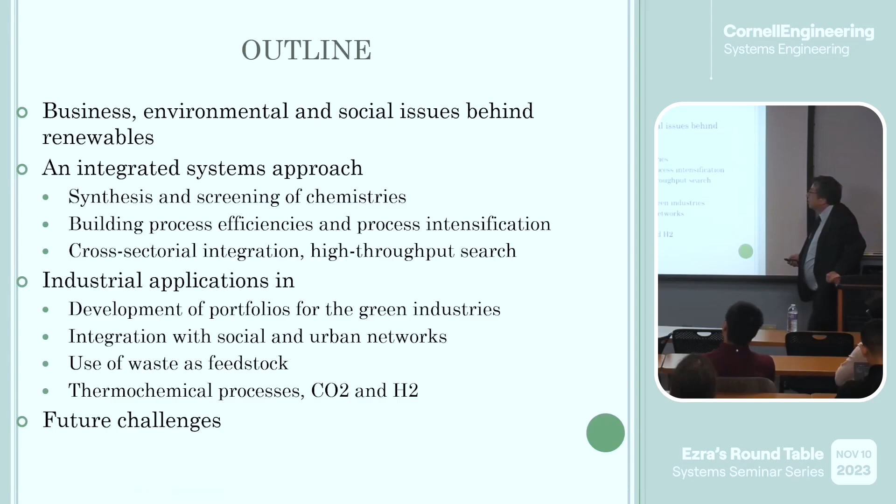As I said, I will start with a quick introduction, since we've lost time, where I try to explain what we exactly mean by integrated approaches or systems approaches, starting probably with the business and environmental drivers that have taken us to renewables. There is little to say about renewables—obviously they're very important things to consider for climate change type challenges. It is about sustainability and the future of our planet. It is also about energy security, but also about economic drives, jobs, and new technologies and innovations. So this is all about that.

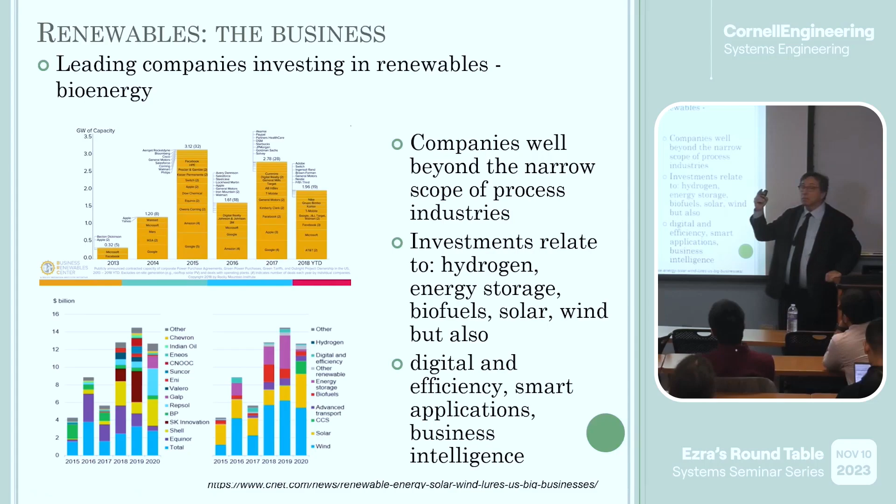It's interesting to know it's not only the chemical engineering community that is interested in this—it's also other communities. It's Facebook, Microsoft, Google that are investing much, much more in renewables than the chemical industry does. But of course, the chemical industry is doing a lot of that too. Also, climate change legislation is driving in this direction. And after all, chemical engineering has the legacy of dealing with chemicals overall, so it's natural knowledge and expertise that can be exploited. This can be even more intensive when considering aspects and challenges of circular economy—remember that in circular economy, most of the streams involved are organic streams.

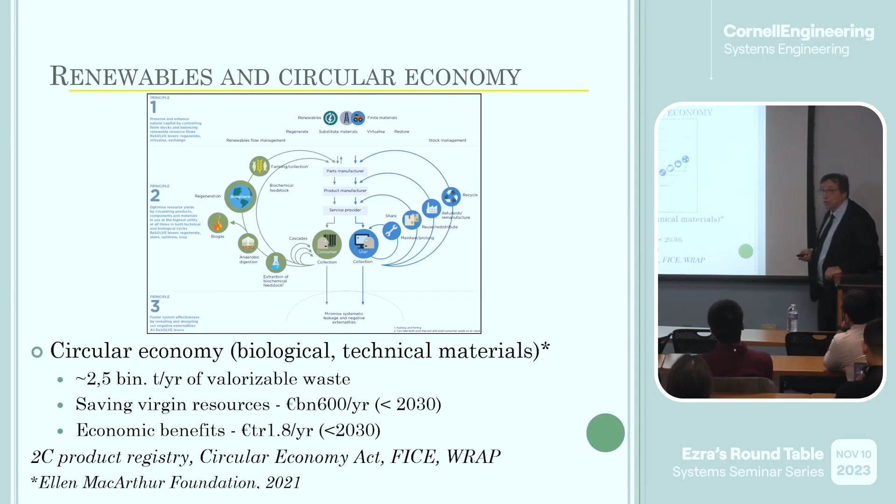So you can tell that the new chemistries that need to be developed will come from domains like us.

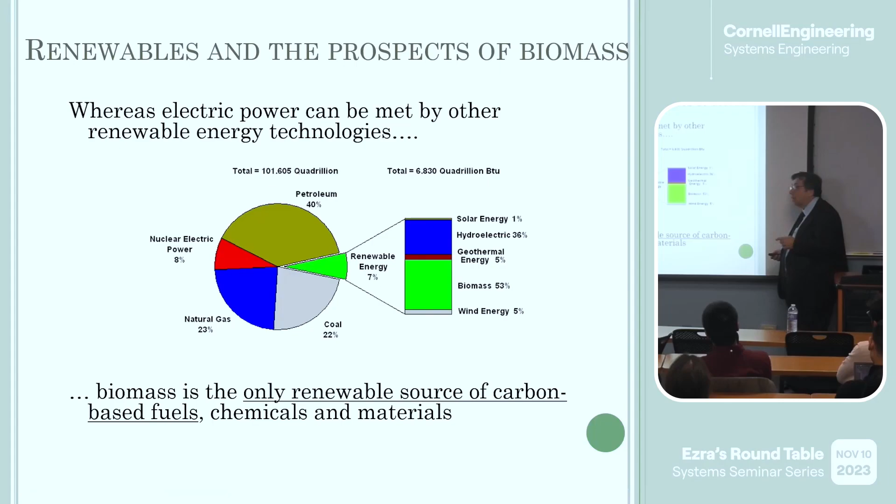I like this slide to remind people that out of all renewables, many think about solar and wind as being more important. But if you really see the fraction of biomass in these renewables, it's by far the largest part. So from all the renewables, biomass is the most abundant, the most promising, and the only one related to carbon. Carbon has been the basis of most chemicals we see today.

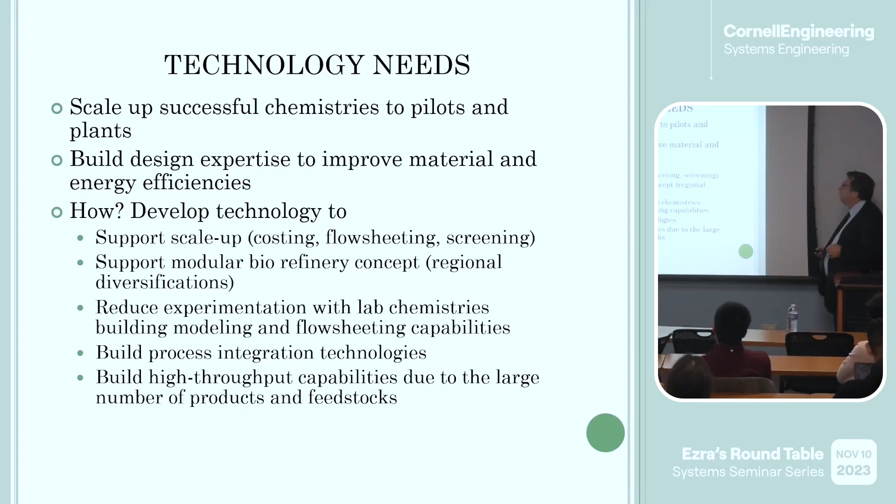And this is where most of the help is there, and where chemical engineering stands for that. We have this legacy, this historical experience. Remember, we have been the ones who started the conventional refinery. For those of you who like history and want to see what happened back then, they were subsidizing the use of fossil oil against biodiesel. So that was the time then.

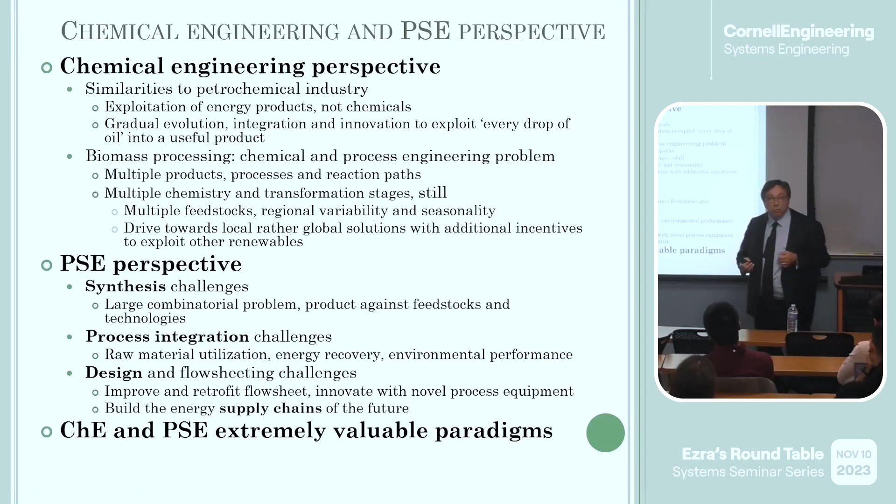They started making easy use of oil and discarding the rest. Now, getting into the point where every drop of oil comes into something useful, it's a very integrated, very efficient type of industry. Against this background, we as engineers have process systems engineering, which has an important role because it has capabilities and tools to synthesize, to come up with options, screen different options. It has technologies to build efficiency through process integration, and through modeling, simulation, and model-assisted tools. It can scope, analyze, and scale up different things.

So this is how the whole situation can be parallelized. In systems parlance, you can give this definition of the problem as follows: given some chemistries which have promising footprints, what I want to do is scale up so that I have a holistic, full use of the material. I want to identify a portfolio of products I need to develop and build efficiency, and as you would expect, this single step will not be enough. You need to probably iterate.

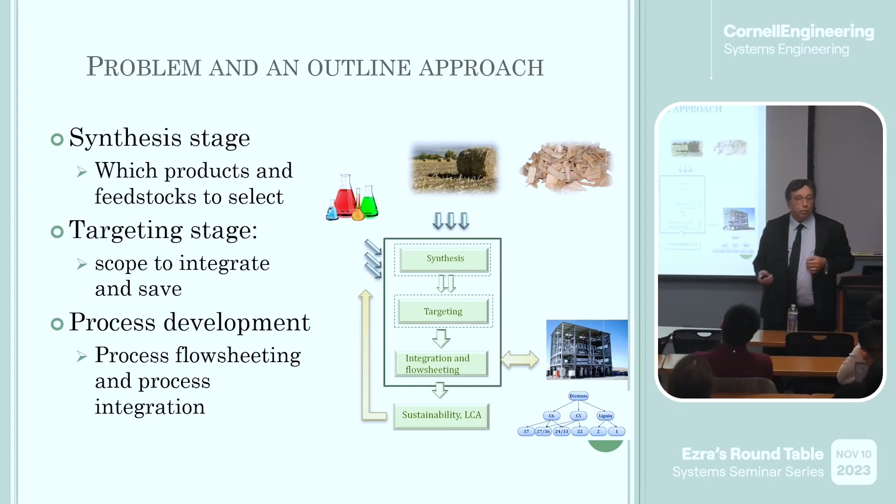Let's follow this with a real case. My first real case was 10 years ago, when we started with lignocellulosic feedstocks. We are based on French technology, organosolv, this particular organosolv process that saves lignin as a useful, valuable part. Then the whole thing is how to develop a portfolio of products that holistically uses the feedstock with best efficiency.

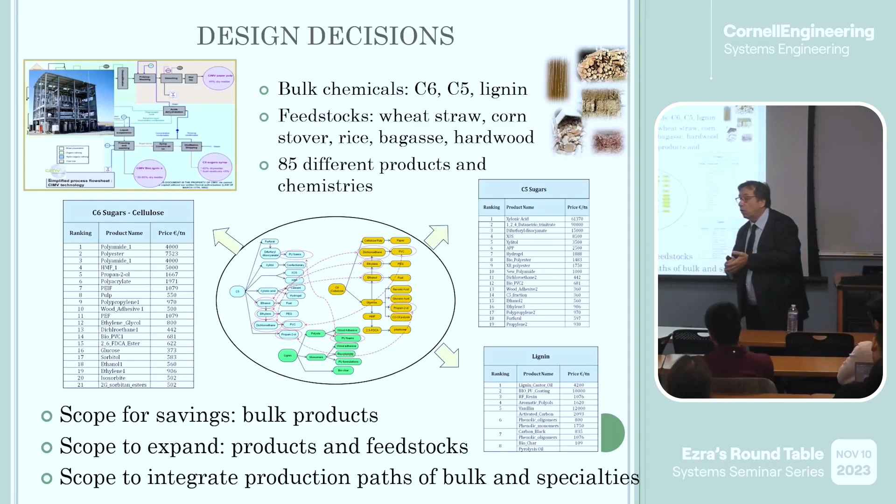So the different colors here indicate the different options you have for different products. You have to integrate in particular for each product, as well as different production lines with each other. So the first part, as we said, is going to be flow sheeting, simulation, this kind of stuff that we usually do.

And this is the kind of simulation we developed for the basic process. This kind of simulation would take for a conventional flow sheet probably 2 or 3 days. This took 2 years. Why? Because we didn't have thermodynamic models. The process engineering models were not conventional ones.

So we had to tweak around models for many, many weeks and months before we converged into something reliable. And this is the first message: when you address this kind of problem, you are talking about a possible new generation of models, not models only for process, but models for thermodynamics. You cannot otherwise tackle this non-conventional type of substrates, non-conventional type of products, and definitely non-conventional type of process engineering stages.

And then again, AI can be in terms of hybridized models, as you want to keep the first principles in place, and in a systematic way embed and incorporate as much data as you have available from the different experiments, but not wasting all this information as you move from one kind of case to another, consolidating this information for general use.

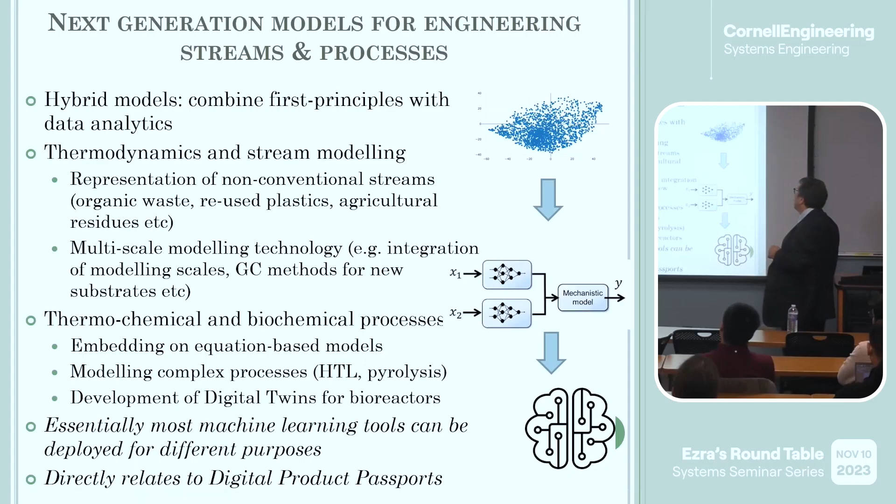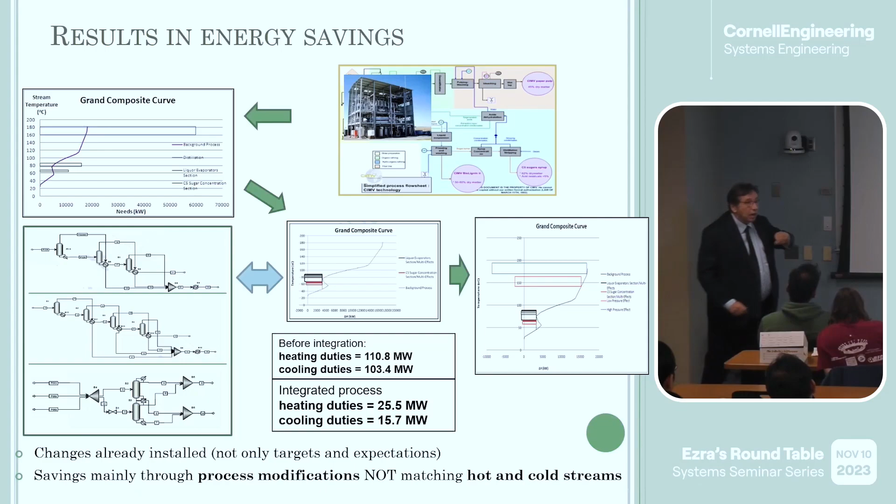Why? Because conventional process integration, conventional energy integration, first of all knows what the hot and the cold streams are. Here in our case, we don't know, these are synthesis streams. So we don't know whether they are cold or hot. We don't know whether they are large or small. So CPs are variables, the existence of streams are variables. You have a much more complicated picture. In this complicated picture, you need to integrate mathematical optimization tools that will give you the opportunity to come up with a much wider space than you have, as well as conventional thermodynamics that you used before.

It's an excellent basis to do the work. So here I show the kind of tools that we have used for individual units, how to connect these units against a moving background of options.

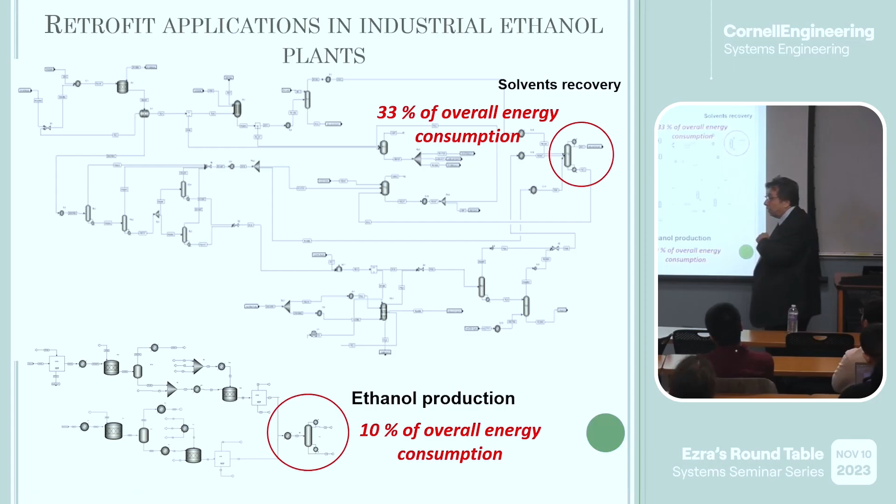In this other case, how to retrofit an existing plant in terms of its solvents recovery part or its ethanol production part. Again, remember, this can be done automatically with tools.

And this is a third case where this 39 megawatt refinery, through combined use of thermodynamics and mathematical optimization, has indicated what kind of pressure changes are needed, but also what kind of restructuring and integrated columns are suitable to be able to actually have an energy-efficient type of separation for this kind of unit. You see here, the percentages, as in the previous case, have been impressive.

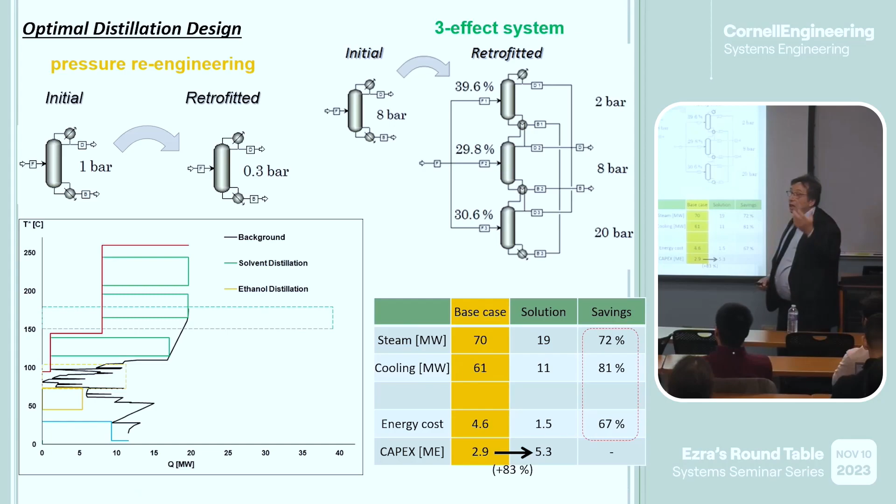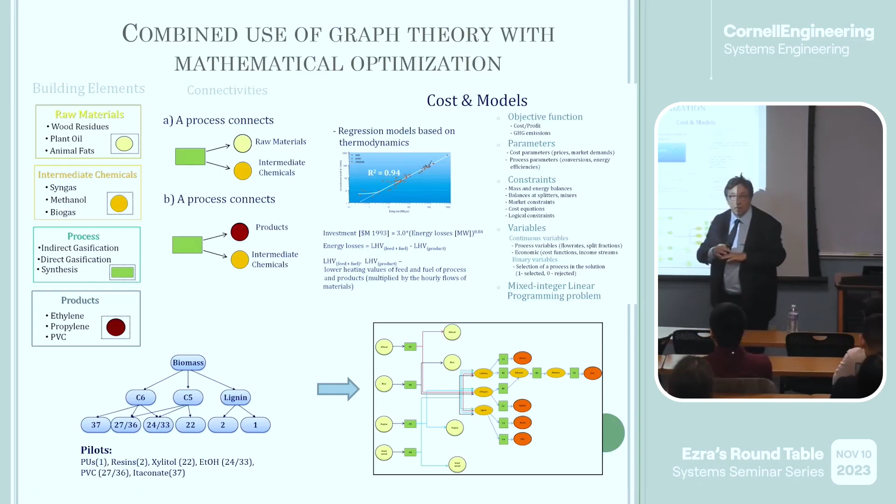So once you have all this kind of stuff, the important, exciting part is to come up with the portfolios. In this case, we have used Petri nets in order to translate the value chains, the conventional value chains, into things that we can formulate as a superstructure. The value chains are not modular enough because they have overlaps between the different parts of Petri nets, which is a kind of graph kind of development.

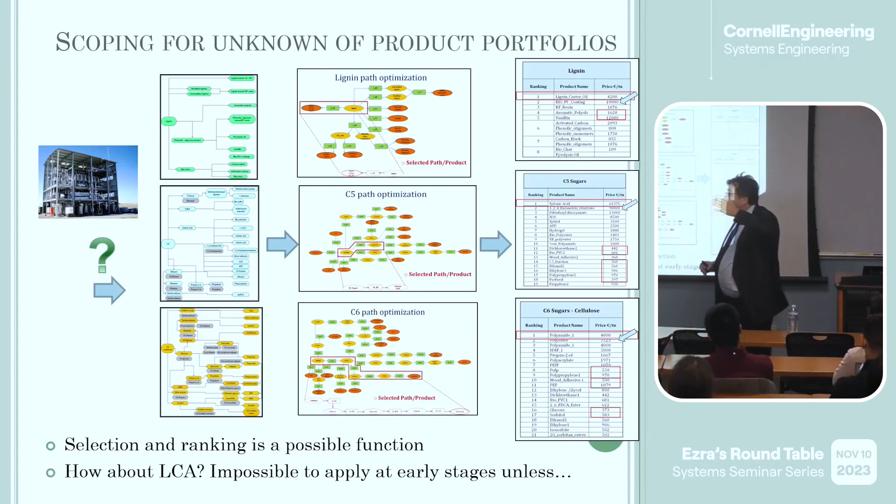This can help you come up with a superstructure that will tell about the selection of feedstocks and paths, or the selection of co-products, giving you suggestions of what you do, and going back to this French biorefinery, giving out what kind of promising products we have for each individual fraction.

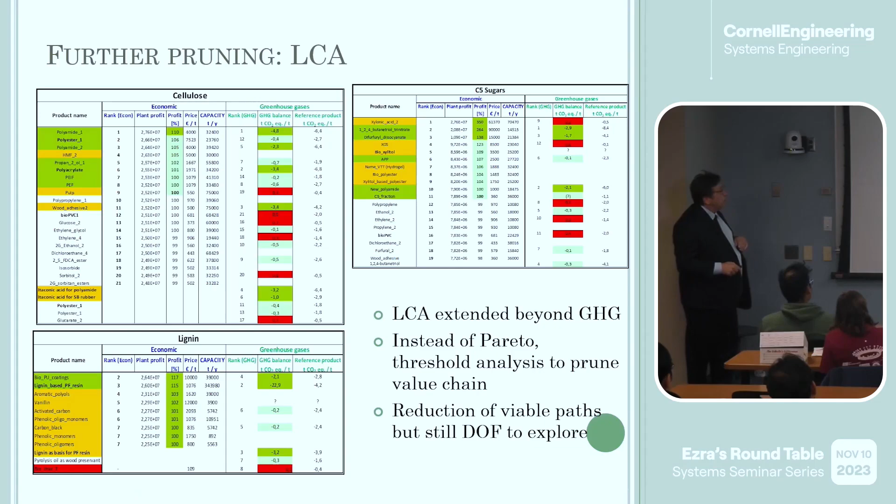So what we have now is, we haven't had an exact portfolio, we have the most promising products. So we have tailored, we have pruned the large tree into a much smaller tree, and now what is left to evaluate is energy integration across different paths.

So remember, so far we have assessed, we have evaluated each individual production line. Now what we are going to do is assess the scope to integrate one full path with another full path. If you really see, this is also covered in conventional energy integration. This is what they call the total site analysis.

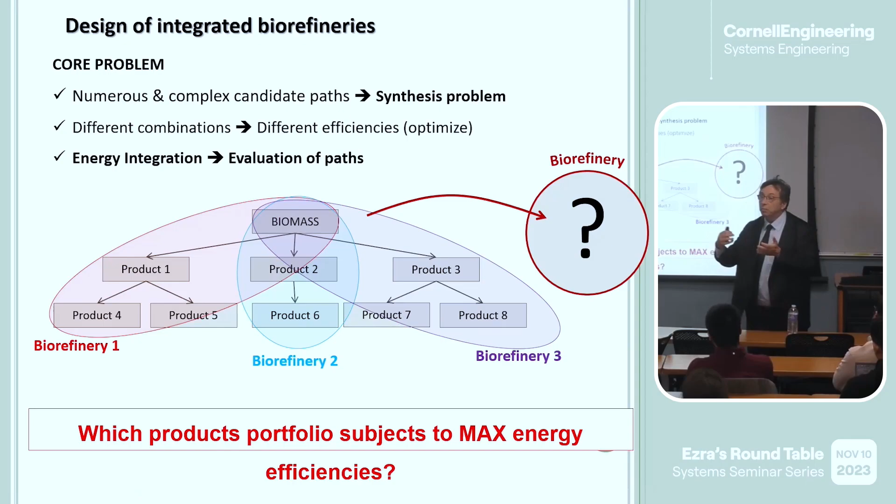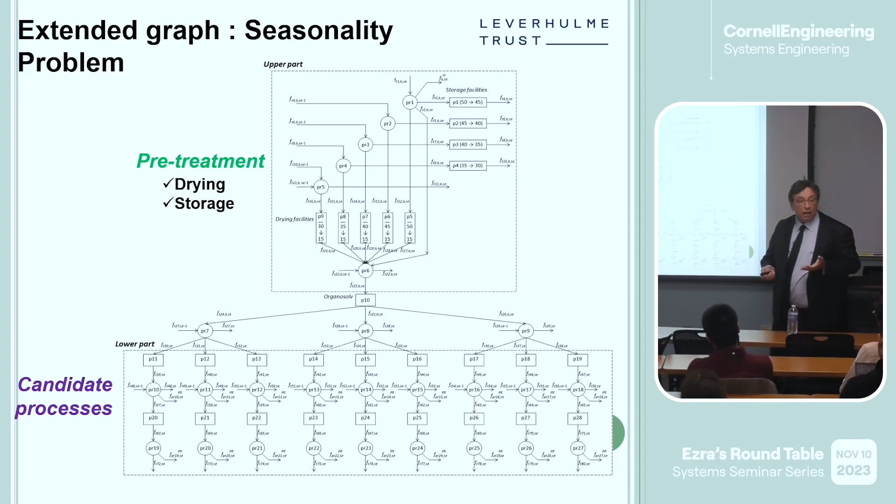But again, as it has been with conventional process integration, this is all on the basis of fixed streams. In our case, these kinds of streams may have a different identity, may have a different capacity, may be a different thing. So again, you have to rely on mathematical optimization plus thermodynamics, where this is one part for the pretreatment, and then you have more or less a hyper cascade kind of formulation, which you can set up on the basis of thermodynamic values and optimize as a mathematical optimization problem.

I mean, I can pass this one. Basically it has mass balances around the graphs that I was showing before, as well as this hyper cascade, which is more or less a combination extension of the thermodynamic models that are used for targeting energy.

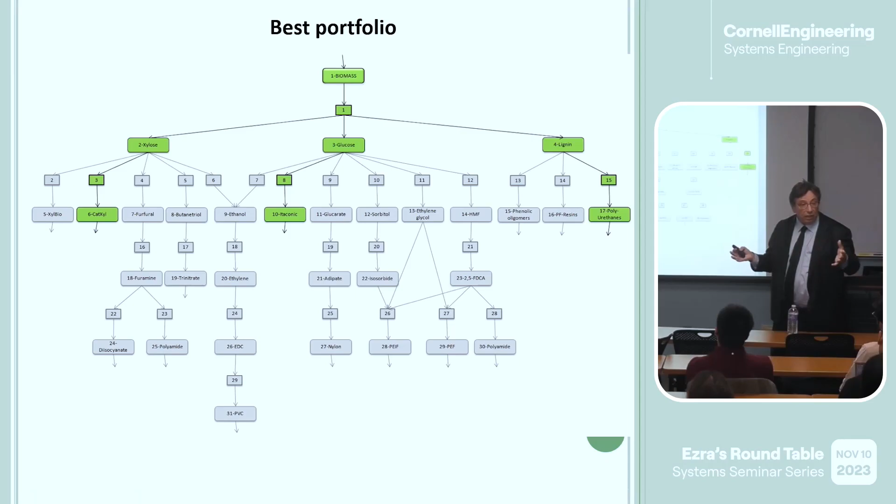So this kind of thing can be applied systematically to come up from this kind of pruned tree of the previous stage, to come up with options that offer better integration, accounted for in terms of savings.

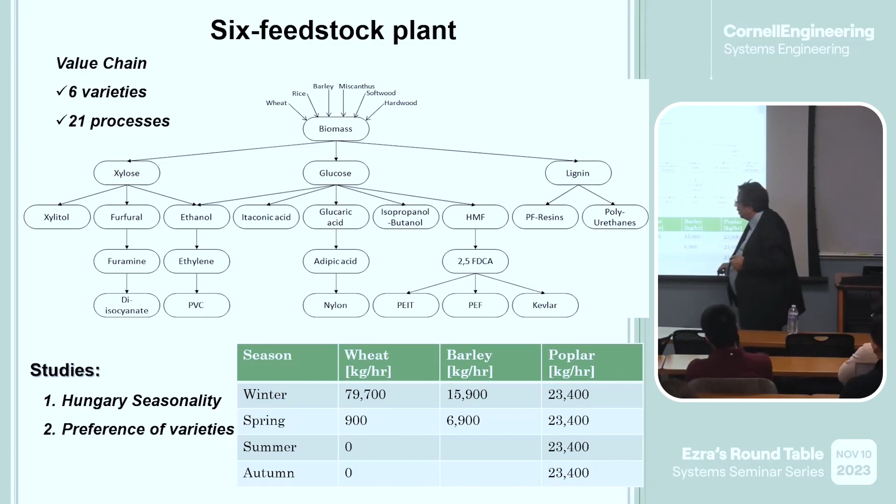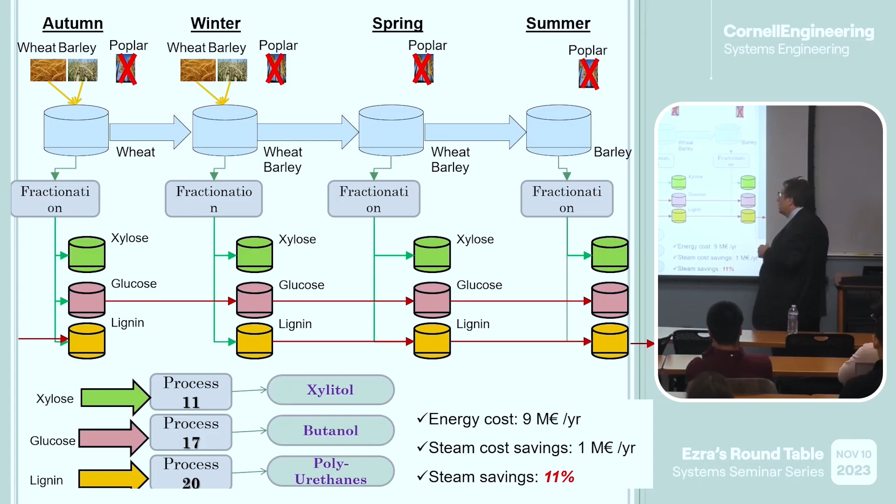Let me go quickly through the extensions I've done. One has been in terms of multiple feedstocks. Here you have 6 different varieties of feedstock, again 21 processes. This has been a real problem in Hungary, Central Europe. And you've seen the kind of schedules you can identify using extensions of mathematical optimization tools. You can also account for changeovers with respect to the different feedstocks available.

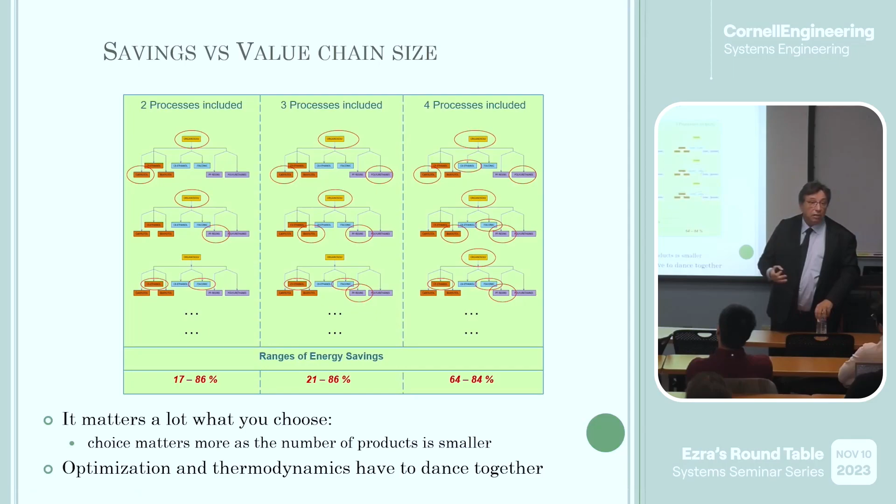You can mitigate the extent of integration and have safer or less intense options, as we saw in these pictures. As a general rule, as expected, the larger the biorefinery, the larger the scope of integration. Again, I'll go quickly through that. You can also address waste minimization and waste management around this biorefinery.

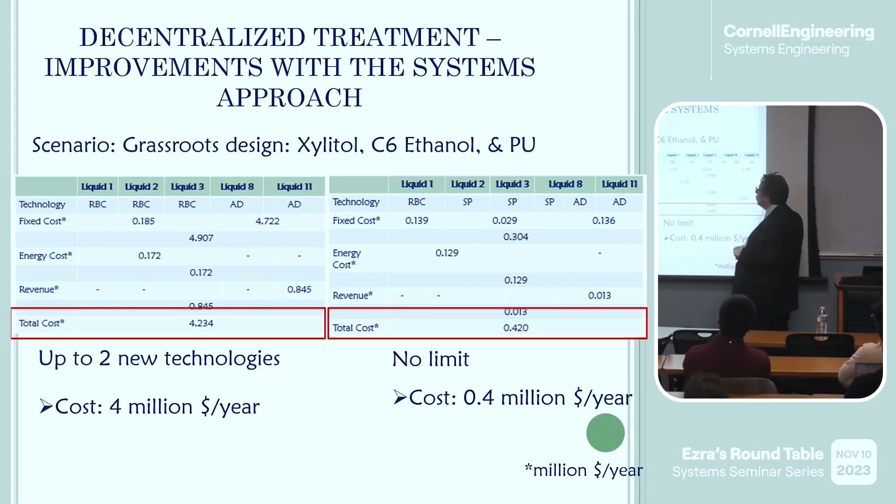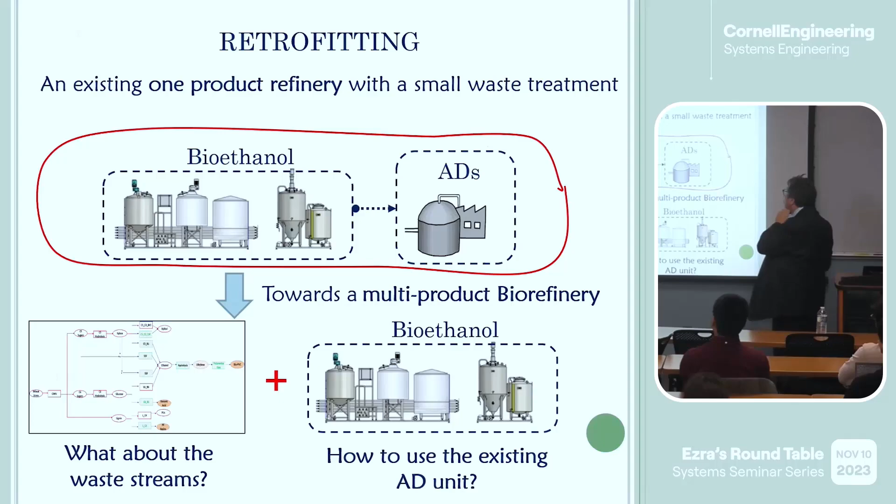Here you have a large number, 49 waste streams that you need to take care of. So you can do that again by extending the superstructure, optimizing the whole thing, accounting for cases where you have a target, no restrictions, or setting up targets. In this particular case, this was the real part, accounting for retrofitting, in other words what kind of investment you would make in order to manage your stuff properly.

And then in the end, rather than paying for that, you can identify some profit. The cost lines I was showing before have now become not a burden, but actually a profit. We said we have a systems approach, meaning a generic approach, so you should be able to repeat this kind of stuff for any other biorefinery. So I'll go to another biorefinery, very different now: the algal biorefinery.

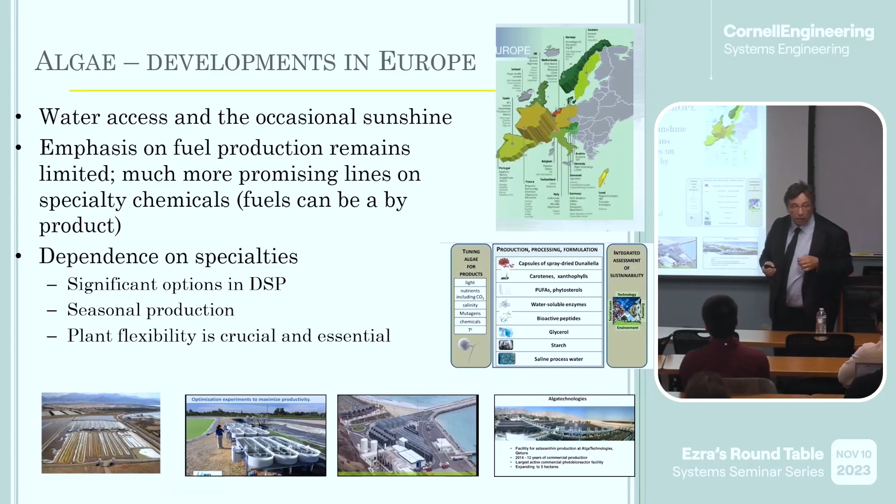This is processing Dunaliella salina, a more promising type of product. Again we bring up the same type of three-layer system. The value chain is more or less this one, a new type of value chain now. And we have to do the same thing we did before. And this is what we do.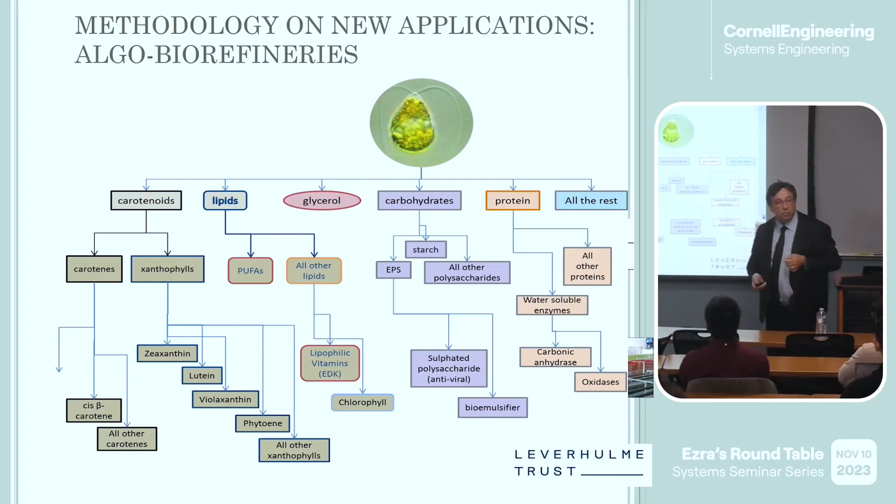Basically, we have 4 different stages here: cultivation, harvesting, fraction extraction, and product recovery. So this is the kind of stuff where we need to identify the appropriate separation stages, the sequence, and the integration between them.

But let's take a break and ask: what's the big deal? How about doing that in a more spontaneous way? I mean, I go and identify one good product, develop the biorefinery, then go to the second product - the sequential approach, as we say. What do you miss out of that? Actually, this is a historical example, because this is how the Israelis developed their biorefineries.

So let's say glycerol is a nice potential for fuel. This is the kind of flows you can have, these are different compartments - again, I'll go quickly. Single product glycerol: this is a biorefinery with a single product. This is unsustainable; it doesn't make money.

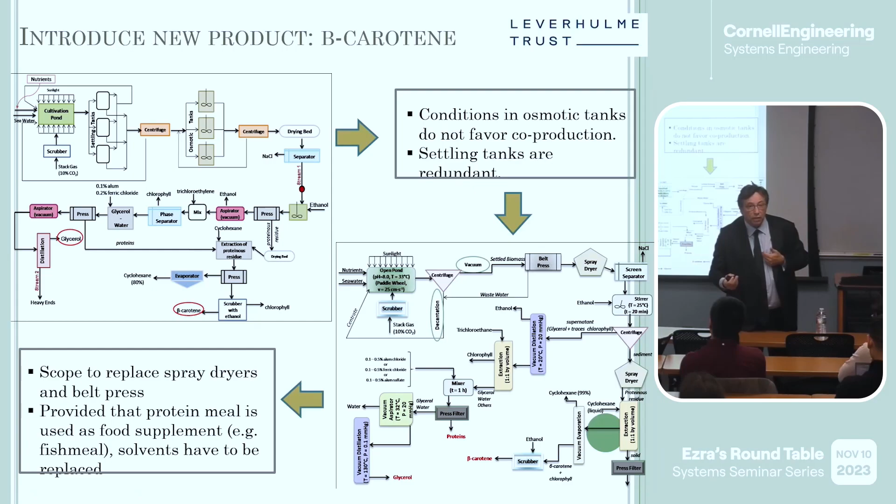So you go and say, how about introducing carotene now? As you introduce carotene, you see you move from this flow sheet to this other flow sheet where things have changed: the sequence has changed, the process has changed, the integration has changed. Well, if you do that, the good thing is you have turned your losses into profits - from this viewpoint, you have done a good job. But if you assume you had done the sequencing before, you are actually changing the whole plan into a completely new kind of thing.

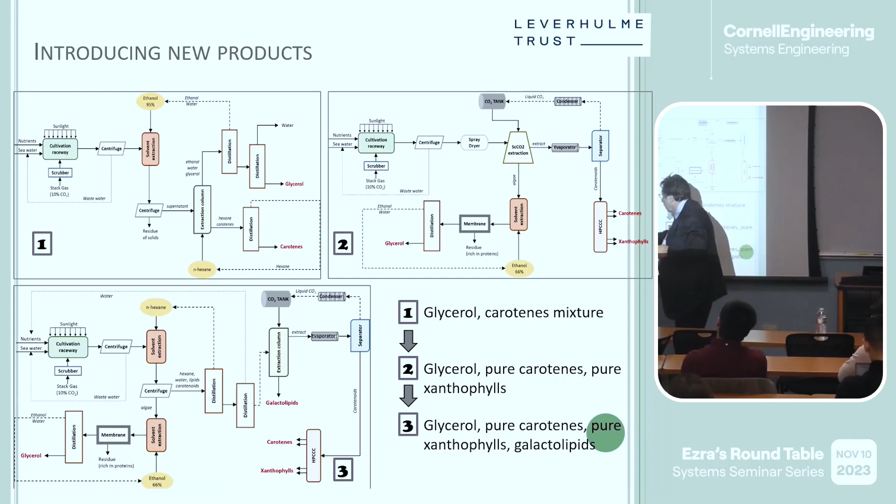And if you do that continuously with other products, so here we had the glycerol, we involve carotenes, then carotenes, if they involve xanthophylls, or if they involve galactolipids, yeah, then you go from 1 to 2 to 3 to 4, and then you see that the flow sheet continues to change completely. So you can say that the sequential approach is a good way to burn money, like water, yeah, spend money like water.

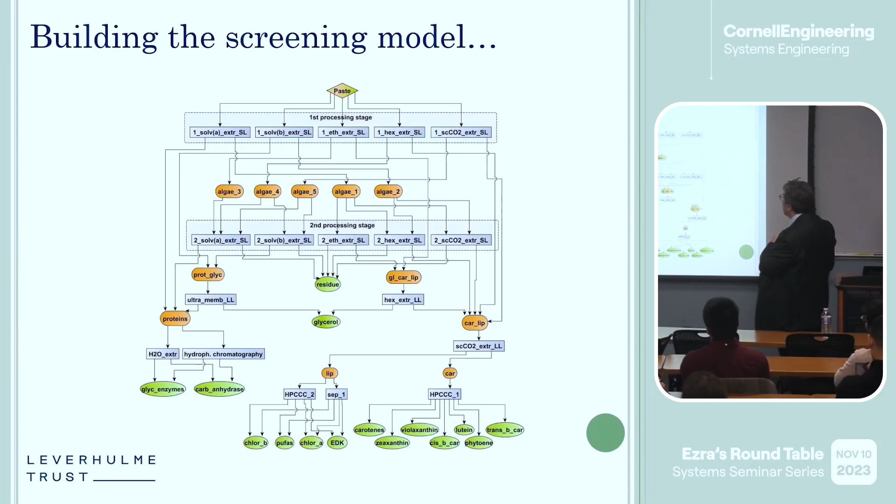So the simultaneous approach works differently. It brings everything together, as we said. It identifies the different options, processes, products, and you can build these superstructures as different instances there. And you can optimize the superstructure for a number of cuts, and what you get is some sort of target profile, where for each different region you identify a select number of products, processes, and portfolios. The actual type of processes, products and portfolios will come up through this kind of graphs that identify more or less what are the most critical processes for you to involve if you really want to optimize these different options.

And this is in terms of products, you see what kind of products appear more profitable. Algal biorefineries produce specialties, and for specialties we never want to have large volumes, because we shoot our own foot, we need small batches. And there is a challenge there: what am I gonna do with my plant for the remaining of the year? I produce in a batch for a month, for 2 months, and then how about the other months? So multi-algal biorefineries give flexibility in cases where some of your products may be cancelled by the FDA or whatever - what are you gonna do?

So because again you have a systems approach, you can use this to formulate multiple kinds of strains, as I will show here. You can have different value chains from different strains and develop these designs uniquely for all of them. So this is designing a biorefinery that will not treat only one algal strain, but multiple algal strains.

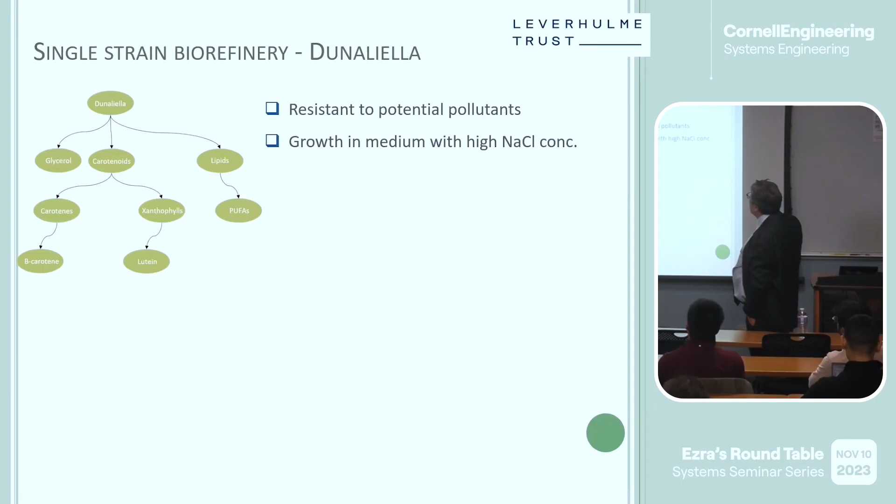I will illustrate that with a real case where we have Dunaliella, Haematococcus, and Nannochloropsis - now we have three kinds of strains. So we repeat what we were doing before. These are the three value chains, like the ones I was showing before. You can concatenate these graphs, and these are different products which are common, and you can develop, for each one of them, some sort of design.

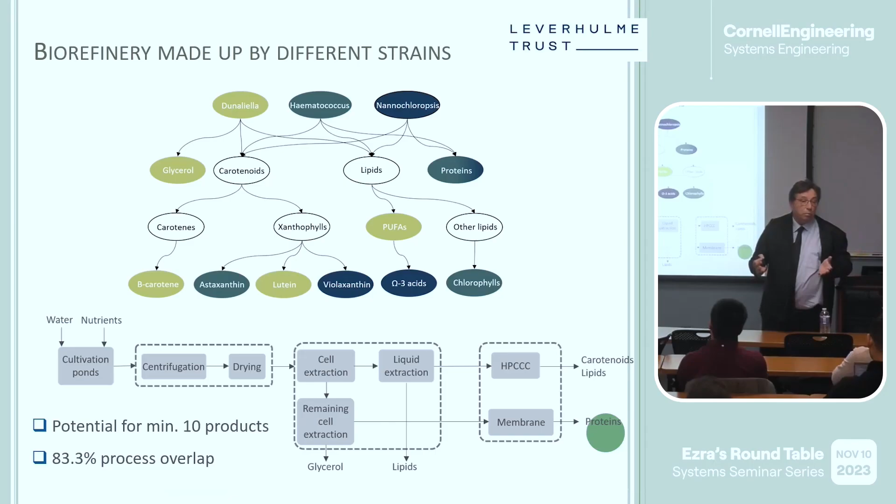But now we go into this kind of unifying thing. So we take, as we said, the different types of value chains, and we create a single value chain. And this value chain is the one we optimize. As we do that, we have min-max type of constraints - we take the minimum of the maximum piece of equipment that is good enough to process each particular batch.

And then you see more or less the difference. The flexible biorefinery will apparently cost you a little bit more than each one of the other ones individually. But this little bit more will let you operate for all the different kinds of strains that you may have. So with some additional investment, you make your biorefinery much more flexible than it was before. Before, again, it was just one strain. Now it is going to be for as many strains as you're going to put in the system.

Now, just to take some water. It's an important resource. It is. Renewable, yeah.

All right, so there is a particular challenge when you do biorefineries, or when you develop this kind of new industries, to integrate with urban and municipal streams. So there is this additional consideration you need to make, and in this consideration, sustainability is not in terms of indicators, LCA type of indicators, but it is in terms of closed fluxes, streams.

Because sustainability, the industrial ecology type of paradigm, has to mimic a living kind of system that has closed streams around their operation. So this is also the basis of the circular economy concept, yeah.

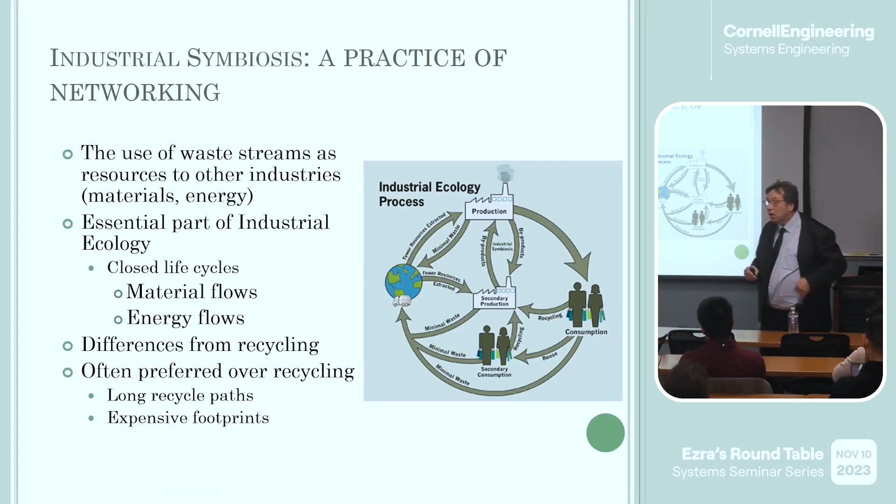Sustainability has to follow these steps. Now, where you have industrial flows, you have urban flows. Ports have been a natural bridge between these two, because industrial ports are not exactly industries, and they are not exactly in urban territories. So it's a nice kind of territory to bridge industrial and municipal flows, addressing this new challenge. We have done that in industrial ports in Europe, and I will show examples of what I presented before.

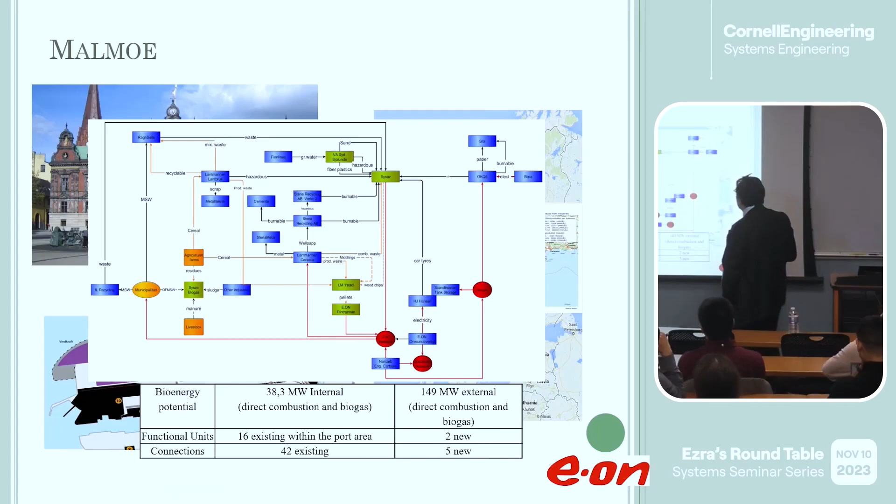Now, with respect to the ports, we have to integrate again, this time industrial and municipal kinds of fluxes. Malmö is a port in Sweden where we started this work, in collaboration with E.ON. Here is the kind of network that you develop, and the kind of energy that you can exploit out of the interactions between these two flows.

Wismar is a port in Germany, in former Eastern Germany. As you can tell, Germans are detailed and record every bit of data available. So this kind of graph appears very detailed, but in the end the potential has not been as great — it's 16 megawatts.

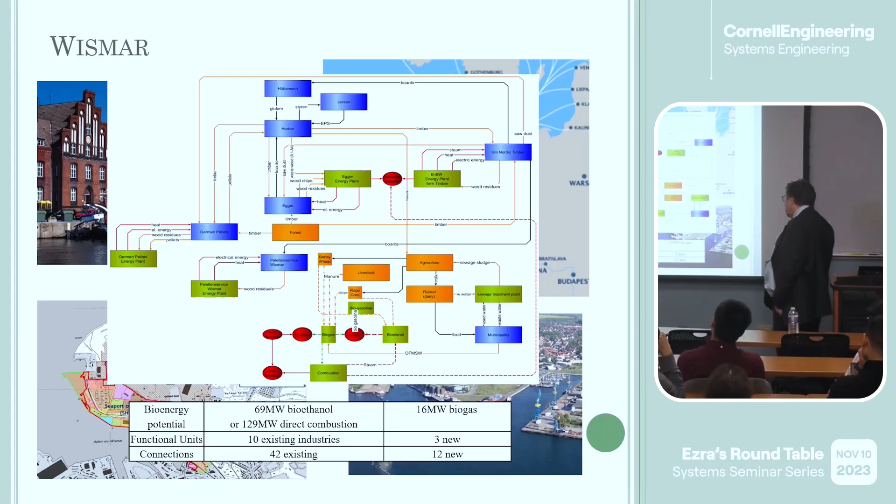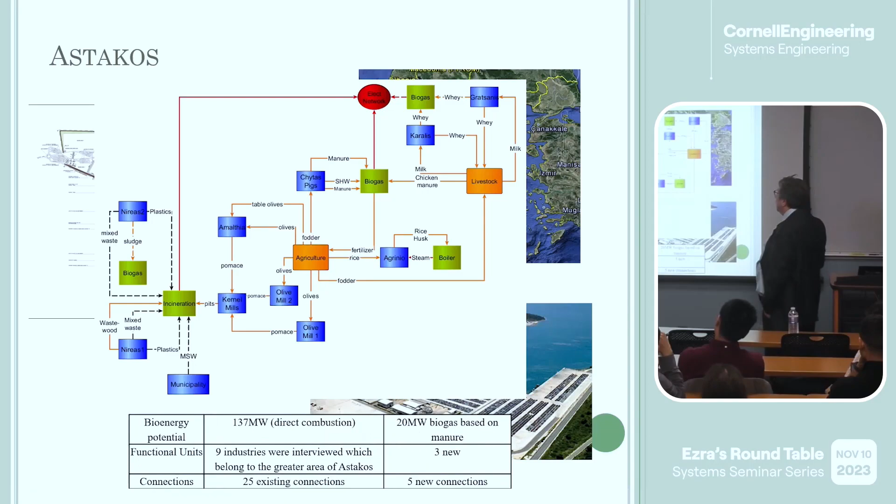This is Greece. This is a port actually which is under sale to the Arabs nowadays, and they have used this kind of study to convince people about the potential of Astakos. This is 20 megawatts, slightly larger than the German port.

The most successful one has been a port which is not exactly a port, Mantova. Mantova is a river port that connects through the river to Venice. This is a former site close to a conventional type of industry.

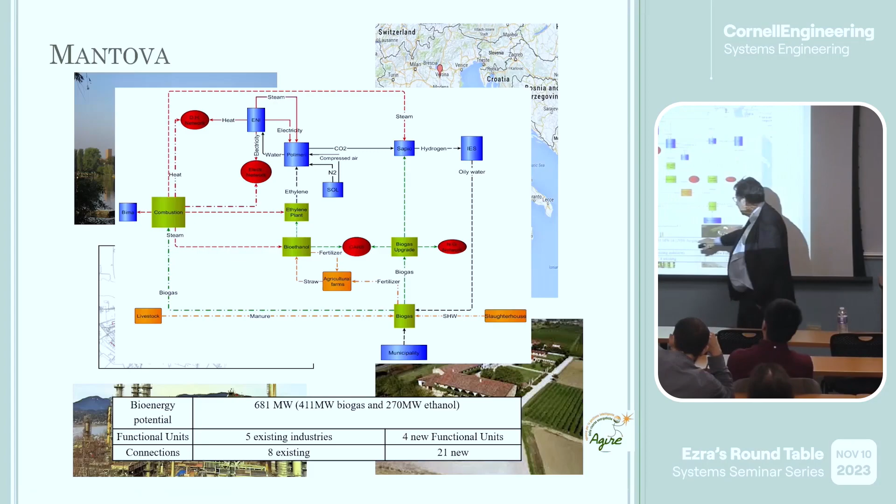This is the kind of network that they have developed, and they have a very impressive amount of energy — 681 megawatts is the number, close to 1 gigawatt.

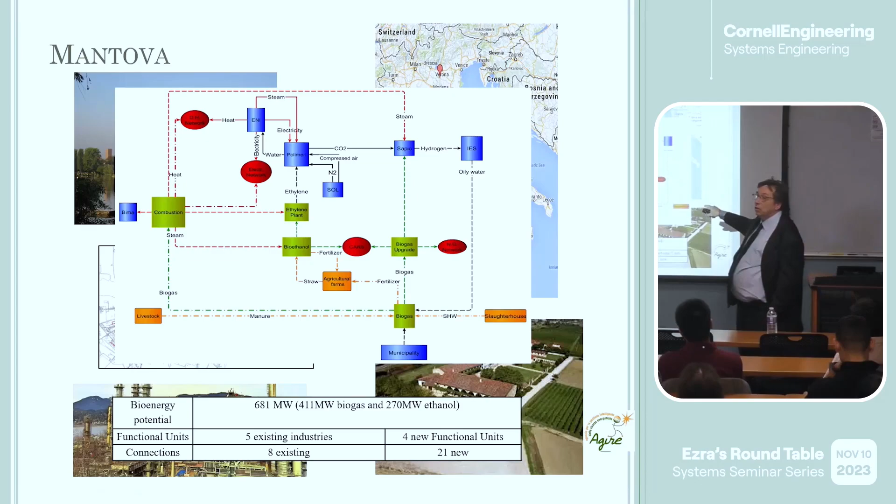This is now the basis for a biorefinery that has already started construction. So if you go back to my slide, Mantova is one of these sites.

When we address industrial and urban flows, we typically engage geospatial, spatial kinds of platforms. We have to challenge these product passports, and we are also using some game theory. I will very quickly touch on these.

So there is an effort to combine measurements — numerical measurements but also images, spectral data, whatever you have available — what you call advanced process analytics technology, into some sort of IDs that could help trade the different waste streams from one side to the other.

I will get back to this issue later when I talk about AI, because AI has a big role in developing this. Now, game theory — why do we need game theory?

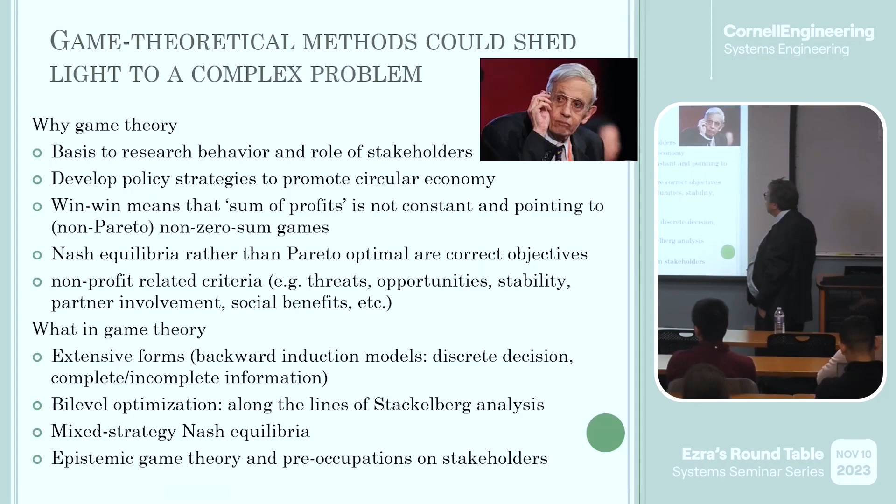So we have done this in a number of cases, not that many, but a few. One is in municipal solid waste management, where we identified that there was no Nash equilibrium in what we have today.

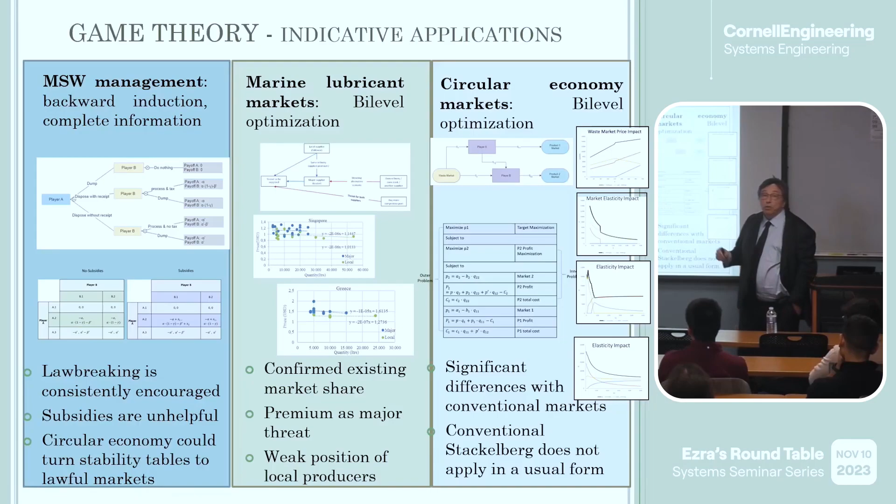In marine lubricant markets, to understand threats in emerging businesses, and also to understand the potential of circular economy to stabilize this picture on the left.

I don't have time for this — it's a separate lecture and so on — but I can share some of the material.

As far as municipal solid waste management is concerned, again, the important part is that what we have today doesn't amount to a Nash equilibrium point. That's why people are bypassing legislation and doing things differently.

The other part is that Stackelberg problems, which are a baseline or reference for analyzing duopolies, don't hold exactly in the case of circular economy. The reason is that in circular economy paradigms, or in the municipal solid waste paradigm, the money you get is from the raw material, not from the product. So once you get the raw material and the money, you have no incentive to go into anything else.

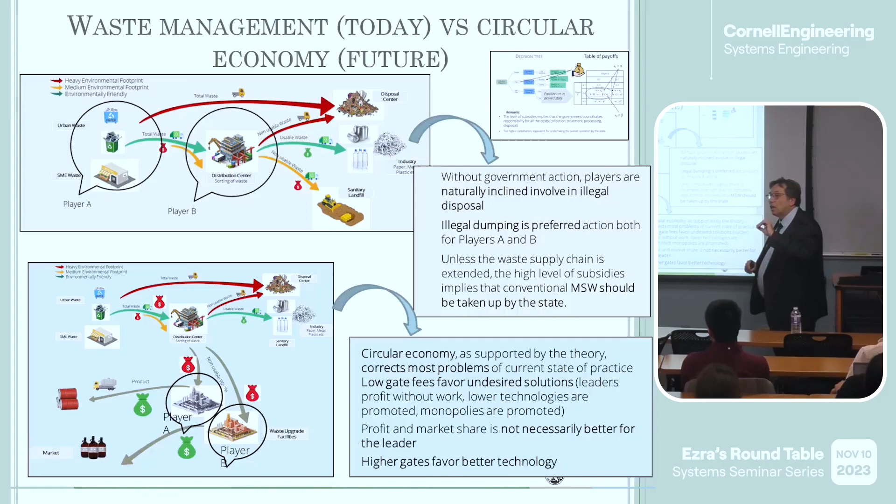You just dump the waste in the night and make better profits this way. Circular economy, from what appears, is a way to stabilize that, but not necessarily. It depends on what kind of technology you bring in, what kind of products you bring in. An important conclusion that has come up is that the first player doesn't necessarily get the better benefits - the second, third, or fourth also has good promise to do things.

So, okay, am I doing all right with time? Oh, you're sure, it's okay? One moment. All right, let me, okay, I can go as quickly as required.

But I'm switching gears now, from the better quality type of biomass and organic substrates, into waste-based, because waste-based is apparently not just less expensive, it is actually income. So this is abundant too.

So I gave this slide on plastics. Plastics is a big innovation line, inspiration line, I want to say, about things we can do. You burn all this, or use these millions of tons per year, more or less to dump to the sea, dump in landfills, or incinerate.

Only 2% is actually recycled. If you go to statistics, they will say 60% is recycled from plastics - this is wrong. 60% is collected. And when they say they collect it, they do all these other things. They don't do recycling properly, but they do this other one. So nothing is actually recycled, with a huge amount of fossil fuel used.

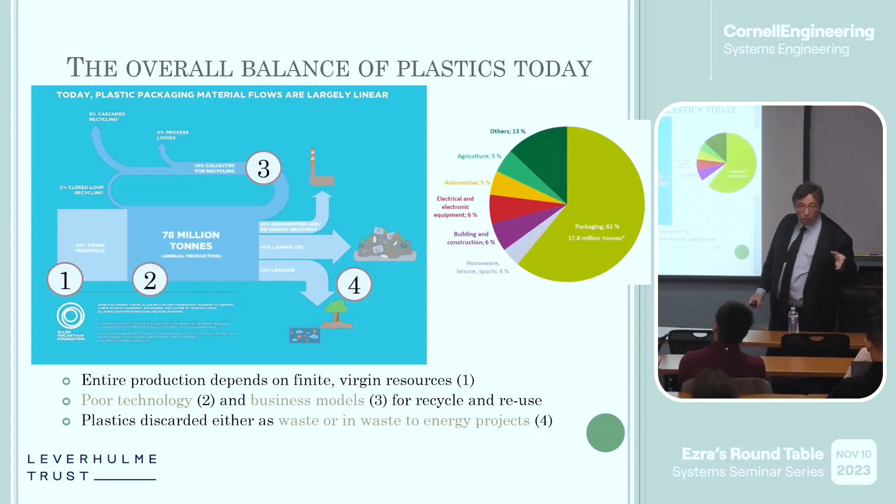So the picture of the future is to have some part of that as renewable feedstocks, say biomass or whatever, but some other part to be able to recycle chemically, apparently - either finding ways to register this properly, or finding ways to change the way you produce plastics.

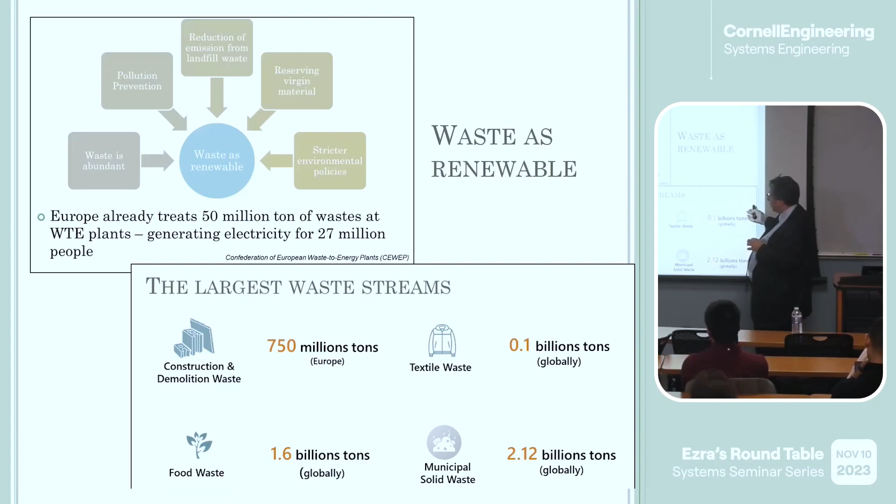So the next project I am presenting is about textiles. Textiles has a value chain, remember the value chain where we started, which is huge, large. I remind you that the 4 kinds of components of textiles are cotton, proteins from wool, polyesters and polyamides. These are the 4 major chemicals.

Out of these, you can create lots of other stuff shown here with different colors. We couldn't afford to have partners for all these entities, so we had a smaller version for textiles, where again the different parts became different things. Terephthalic acid became bottles, ethylene glycol became produced fibers, polyamides - because Arkema wanted to produce threads again from this one - became acrylic acid.

And the cellulosic part, ethanol and proteins from the wool became biopolymers. So with this kind of stuff, we had partners - this was about 300,000 tons per year collected by the Germans using French technology. But we also had people who had good sensors to separate the different fibers, and our role was more or less the modeling and design part.

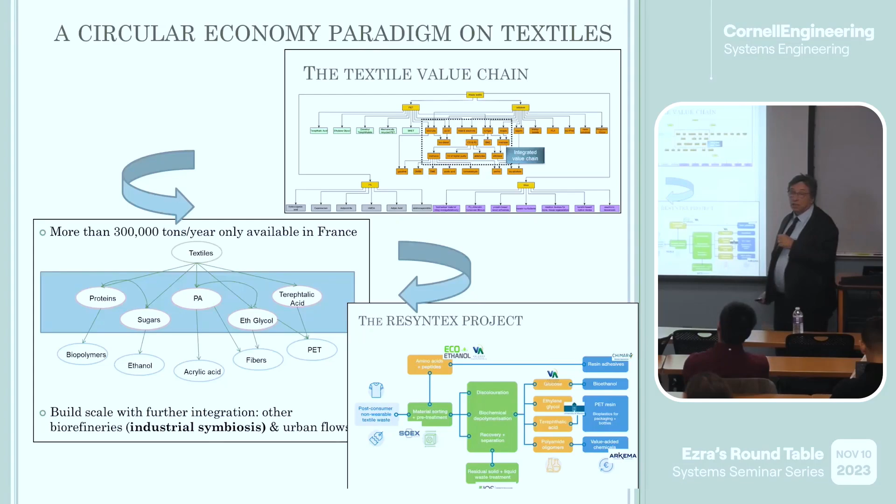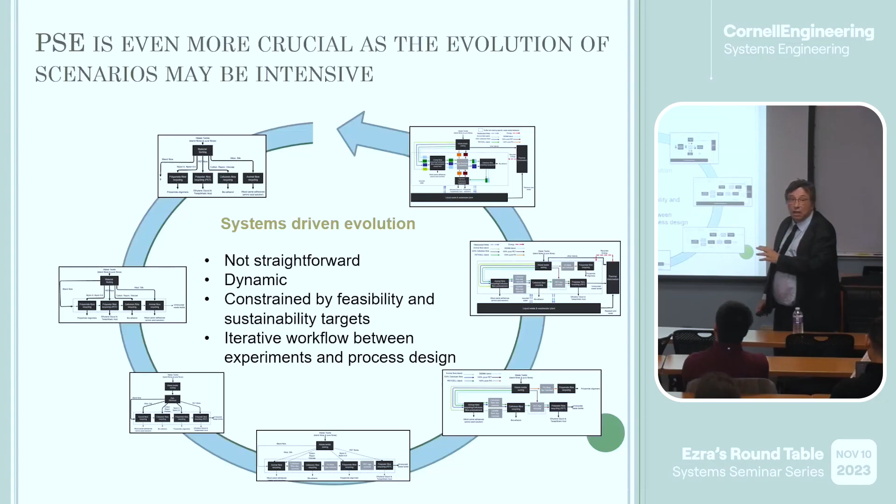And it hasn't been in any other biorefinery that the systems part has been so useful as in this particular case, because this kind of cycle took about 4 or 5 years to converge. You have to resequence the technology, change the technologies, think about industrial symbiosis type opportunities before you convert to something useful, and systems engineering has been instrumental in giving guidance on how to do that.

And even so, in the end, this thing wouldn't be profitable unless in the context of circular economy. In what sense? You had to use not virgin type chemicals, not virgin type solvents, but try to get this kind of chemicals from nearby industries, where these things were not pure enough, but were waste.

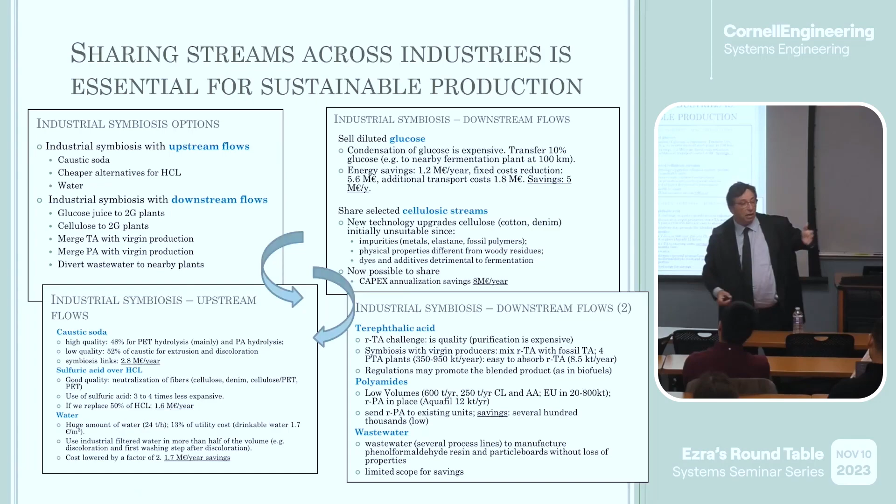The smaller streams would be possible to get rid of, sell, or pass to other industries where they're doing a much larger scale type of activities. For instance, cellulosic streams were not considered in this refinery because they were very small streams. You'd better sell or even give away for free the smaller streams to other kinds of industries.

That were producing ethanol at a larger scale, so it was more economic to act this way. I've talked about bioprocesses, so I bypassed the other important part, which is CO2 as a feedstock, or hydrogen, and thermochemical and biochemical types of things.

CO2 on its own has a separate kind of value chain. Some of the paths have high TRLs, like production of BTX. Some other ones have lower readiness levels.

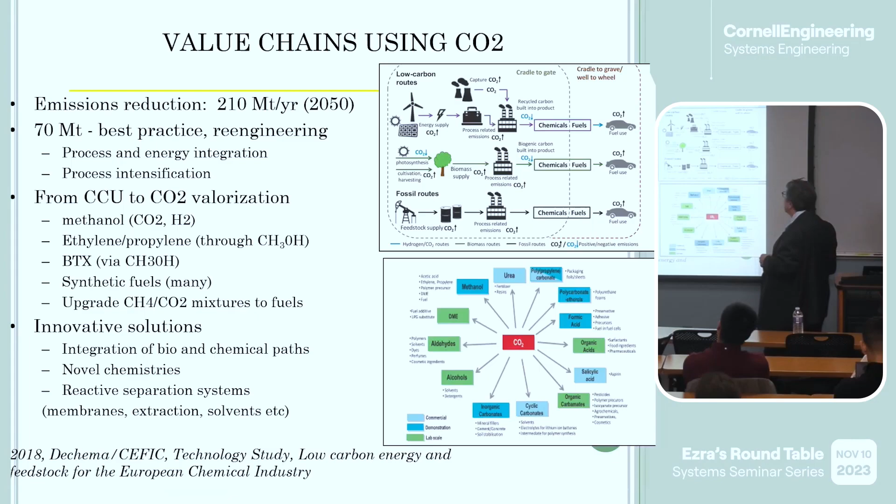A similar case is hydrogen. Hydrogen economy, everything is about hydrogen, but we don't really know what hydrogen should be used for. It definitely shouldn't be used for energy fuel, but should rather be used as a feedstock for other things. Hydrogen can be produced either from biochemical routes, like dark fermentation, but apparently it's more abundant from other types of renewables, with which there is a line to integrate solar and whatever else, where they have hydrogen as storage.

You can produce hydrogen from chemical paths too, like gasification, chemical looping, or without looping gasification, and it can be used to promote the production of other different types of products.

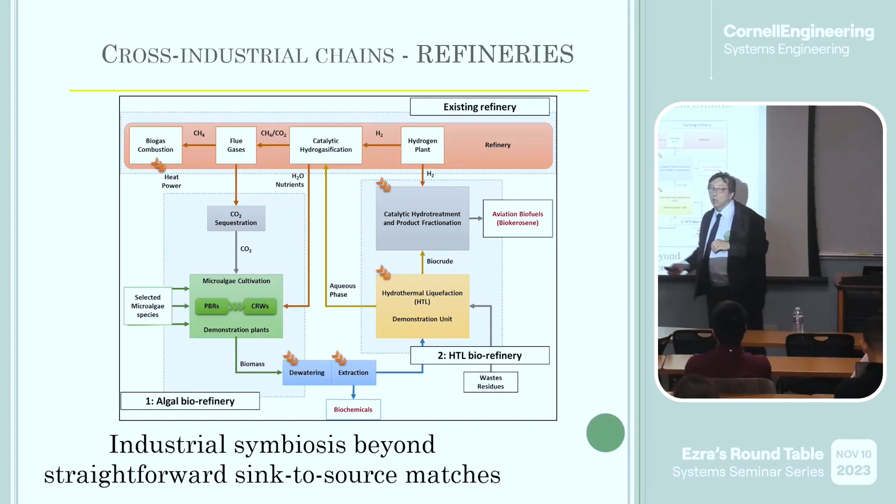And of course you can combine these two value chains, as I have here in the case of a refinery, where the hydrothermal liquefaction of a thermochemical path can take waste heat from a refinery, use the hydrogen from a refinery, use the water from a refinery, and contribute the biocrude to a refinery, whereas say an algal biorefinery can capture the CO2 and make use of the water. So these kinds of interactions are also possible.

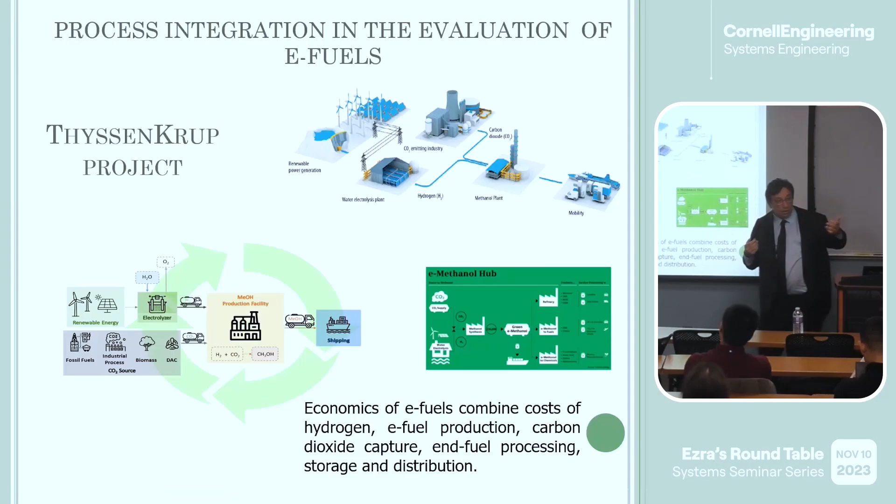But at least in Europe, e-fuels, or electrified kinds of fuels, are a big trend. The ThyssenKrupp project in Germany is one case where you combine CO2 capture with hydrogen to come up with methanol, and then from methanol you can produce other things. Of course, methanol is not necessarily the only path to integrate CO2 supply chains and hydrogen supply chains, but it's one typical project, an illustration of e-fuels.

To connect with my presentations recently this week in Orlando, related to marine fuels: marine fuels are looking for these e-fuels to come up and replace their conventional fuels. At least in Europe, they are not interested in ammonia. So alternative fuels can be LNG, which is a fossil fuel, or methanol, which is an e-fuel. Ammonia, as I said, they're not interested in. Hydrogen and biocrude are the options.

And I will show the results of integration. So the whole idea, other than the alternative fuel, is also to capture the CO2 on board. So as the ship travels, it's able to capture the CO2, store it on the ship, and then drop it off at the port in some way. So here is the huge potential in terms of sustainable LCA analysis.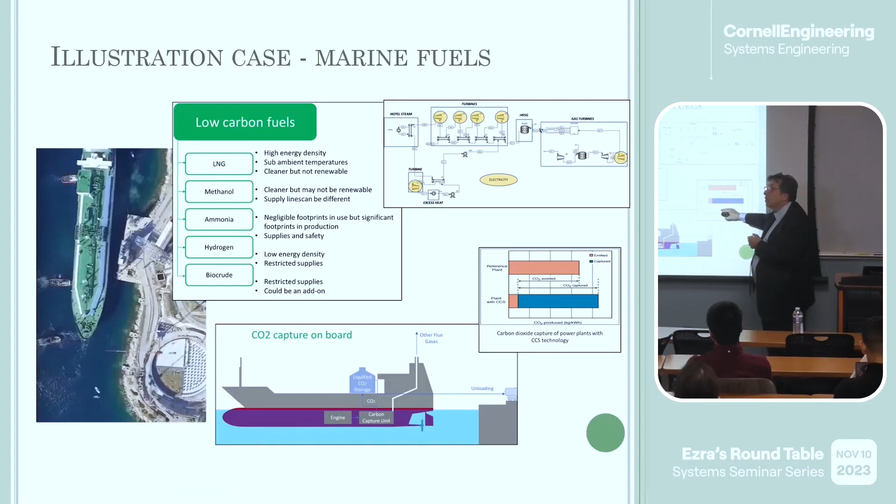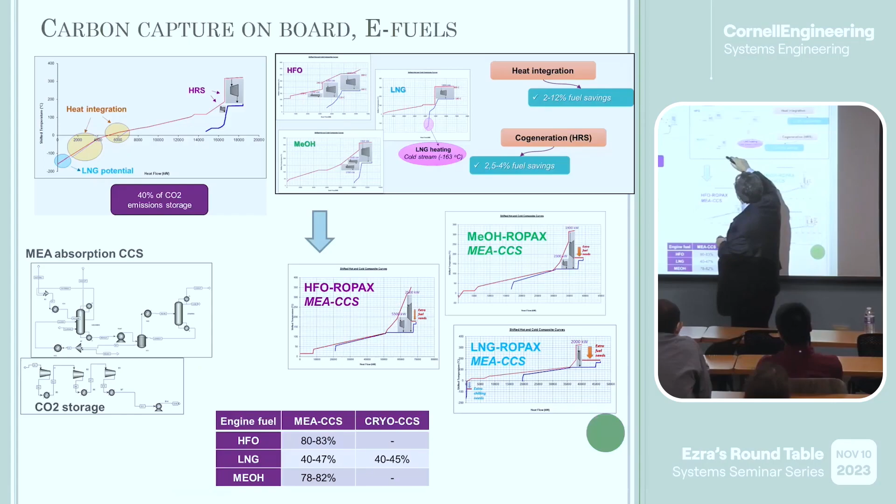Here are the integration potentials for each of the different fuels — it's too much detail for these slides. Just the integration itself isn't a very significant number, a savings of 2 to 4% of fuels. But the important part is this: you can integrate CO2 capture of 80%, 80 to 83%, close to 80%, or even 40 to 47%, without putting in that much additional energy. The integration can more or less help you capture with just a little bit more energy.

And in the case of LNG, which again is a fossil fuel, because you have an abundant cold stream, cryogenic separation becomes more attractive than using amines. Why is that? Because LNG is stored at very low temperature, so you can use this cold stream, from subambient to ambient temperature, to capture part of the CO2 in the emissions and liquefy it.

It also opens up new ways — the systems approach opens up new ways to re-engineer the Wärtsilä engines used in the ships. Why? Because Wärtsilä engines today use excess air, more or less because they want to get rid of methane. Methane is a big issue there. They use an air-to-fuel ratio of almost 60, whereas the thermodynamic ratio is about 15.

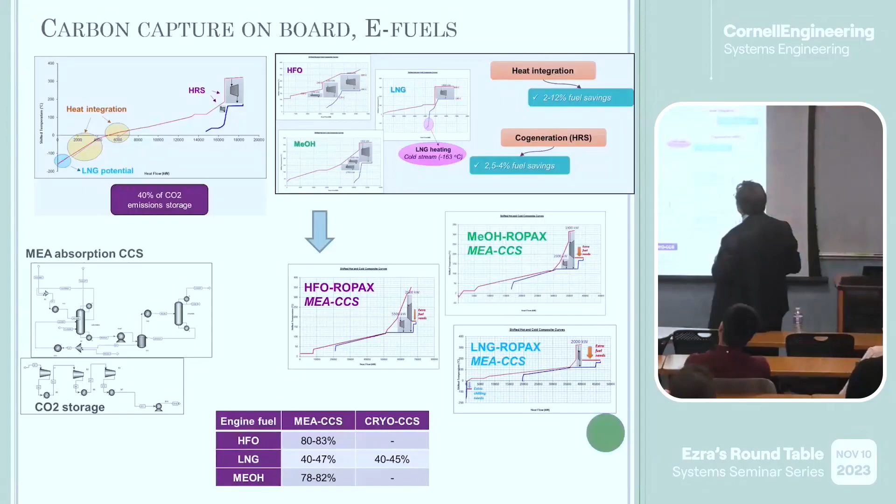Another case, which I saw here, is a pilot we have set up in Greece, which is hydrothermal liquefaction. Biomass, we said, is plentiful, but biomass has a lot of water, yeah? So thermochemical processes like gasification and all that are not as efficient, again because of the water content, with the exception of hydrothermal liquefaction, which uses water to break the biomass into smaller parts. And in that sense, you can use biomass from everywhere, from sewage, from algae, from wherever it comes from. This is an idea of the pilot.

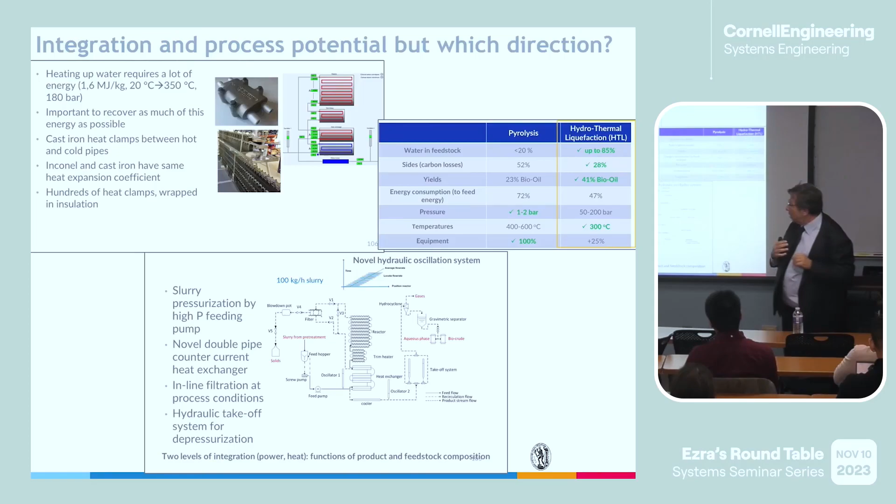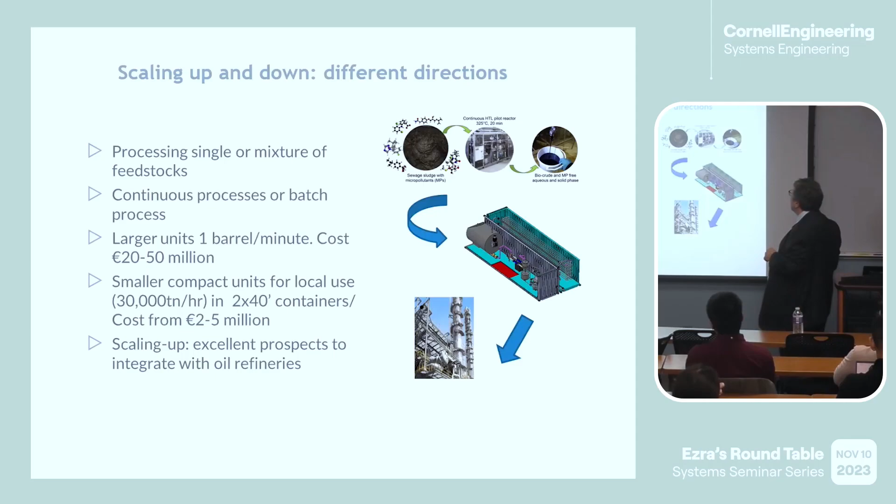This kind of technology also has this interesting potential: it can integrate itself in a very compact way, so you can have a standalone unit that can operate on its own, or you can integrate it with a refinery where you can upgrade and hydrogenate the product into a much better case. So you can work on small scale or large scale, and the trade-offs differ as you go into different scales. If you have a refinery nearby, there's a trend or incentive to share with the refinery. If it's in an isolated area, in India or wherever, where there's no refinery, then this kind of setup can work as well. This is more or less pictures of the same stuff.

I'm closing my presentation, so your patience will only need to last a few more minutes. I close this presentation with a statement: very little of what we do now for renewables would be possible without data engineering technologies.

Data engineering and technologies are instrumental for us to cope with these new problems. I will show a few more slides to whet your appetite, and we'll stop there.

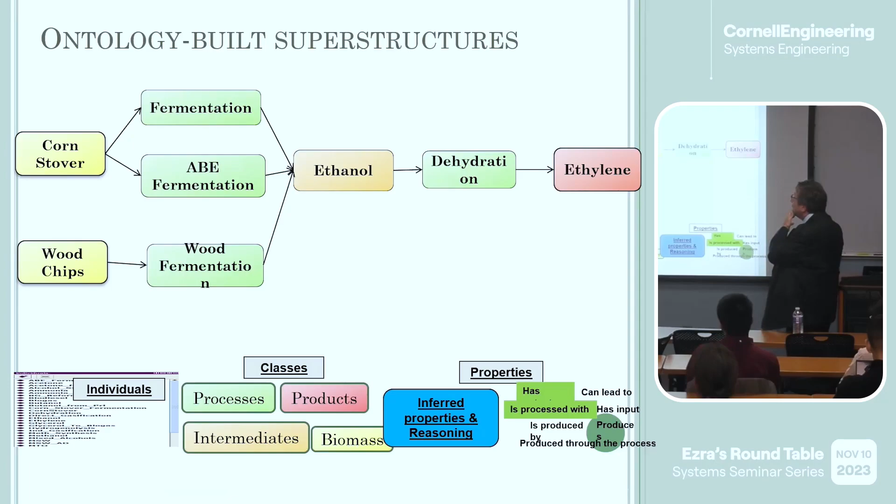These are tools we have worked on in the past, using metadata and workflows to automate all these kinds of schemes that I was showing before. This kind of stuff can use logic to consolidate information from metadata into superstructures automatically—this is something we have in our libraries—and come up with automated solutions, applying it in high-throughput kind of work.

Another piece of work we've done in the past is what we call ex-ante LCA. We've transformed the conventional way of calculating LCA metrics, which starts with background-type data, where we create flow sheets—basically foreground data—and then calculate things. This may take 6 months, 8 months, whatever, and then you do that again, and as you do that, you don't know what you're going to get.

Whereas since we've done a number of cases anyhow, looking at that as a data flow problem—background, foreground to LCA—this foreground can be replaced either by a decision tree or an artificial neural network, trained both from the flow sheets and the foreground data that you've generated.

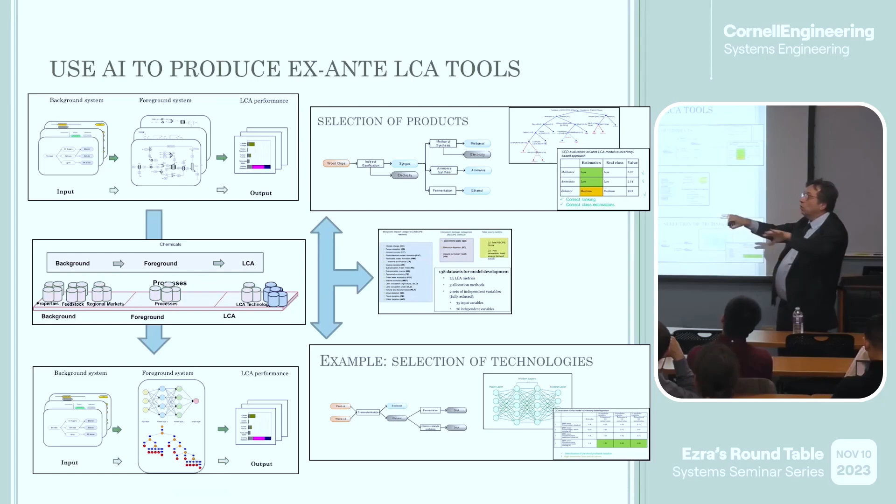And this has worked reasonably well to select in advance products that appear to be sustainable, or select in advance technologies that are promising. That hasn't worked very well when you go outside this kind of training set, but it's another tool.

Now I'm closing with things we are currently working on, work in progress. One is to characterize products, as I said, and feedstocks—this is a big challenge. How are you going to characterize, using the knowledge we have today, things that, for instance, you produce from HTL that look like this? This is like a nasty liquid that you don't know what it is, and no refinery will ever pay for this product unless they know much more about it.

So the kind of data you need to integrate are temperature boiling curves, as shown here, or spectra that you've produced separately in the labs. We would like to have these as kind of stamps that we can use.

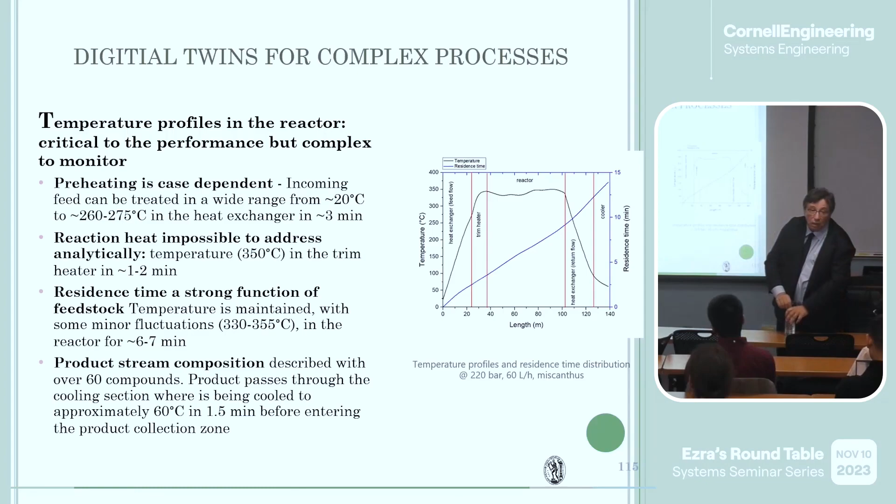The other one is digital twins for complex processes—complex processes like the HTL, or like what I will show in a while, bioreactors—where you can set up models based on first principles, but these models are inaccurate, so you need to integrate and make use of data, as we said earlier on.

Another area of application is where you want to vertically integrate models of different scales. Then you can use equation-free type of interactions or integration between models from one level of detail to another level of granularity.

The domains are set up on different first principles, so integration between these stages is not directly possible. However, using data streams instead of matching equations from variables in one domain to another, data streams can bypass that limitation.

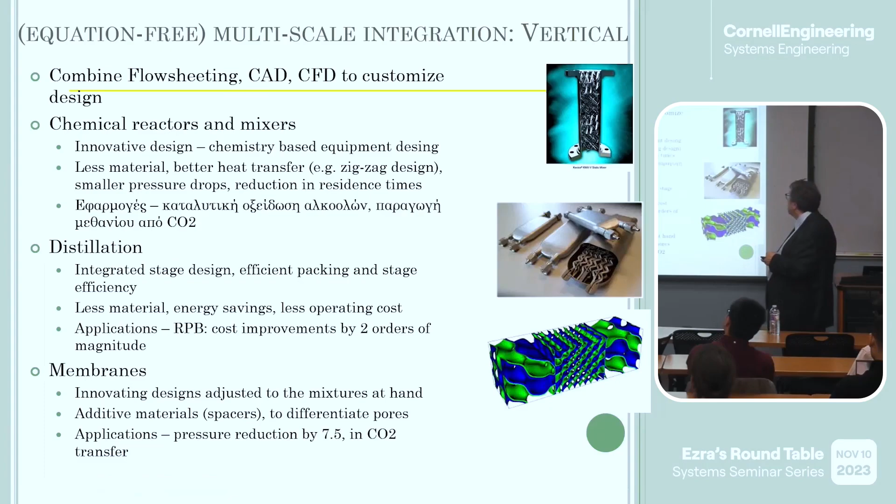Plug and play integration is very useful for reactive separation systems, common in bioprocesses because water is abundant and the organics set up as an azeotropic type of mixture that is difficult to separate. In this case, you need to involve some sort of entrainers.

Entrainers can be used in different ways, or different types of processes can be integrated with the reactor, like membranes or absorption. So this integration of different modules with each other can be done along these lines.

The last part relates to an even more ambitious effort, as we try to combine systems biology with process systems, or systems engineering. Systems engineering and systems biology can be integrated with the purpose of building strains that are custom-made to perform against particular substrates or towards products.

Industrial biotechnology is a beautiful domain where you can build chemistries theoretically as you wish. But these chemistries are not necessarily fast enough, or they produce a number of byproducts or inhibitors that you cannot cope with.

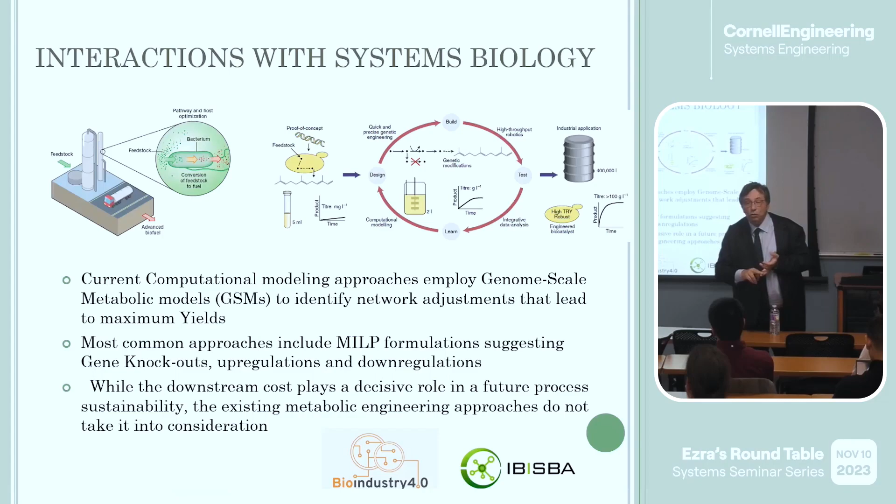So building these interactions between these two domains is instrumental, and this is work we have done in collaboration with EPFL, not the EPFL you know, but another group, where we try to integrate two different domains. In process engineering, we have a good set of first principles for the bioreactor. Yes, we don't know everything, but it's at a good level.

And in systems biology, we have the strain, the microbial organism, for which we know very, very little. Actually, the balances we can write for this system don't account for a simulation model, but rather for what you may call convex kind of analysis.

So you have a polyhedron for which you know your operating system belongs inside it. Or if you look at it mathematically, you have more variables than equations. You can arbitrarily fix kinetics to come up with results.

So what we do is create kinetics arbitrarily, with permutations, in a systematic way, but arbitrarily. We create millions of populations of kinetics.

Then you do clustering and classification, identifying a discrete finite number of clusters, and then you try to match the real-life kinetics with the clusters to configure what could be the most representative option.

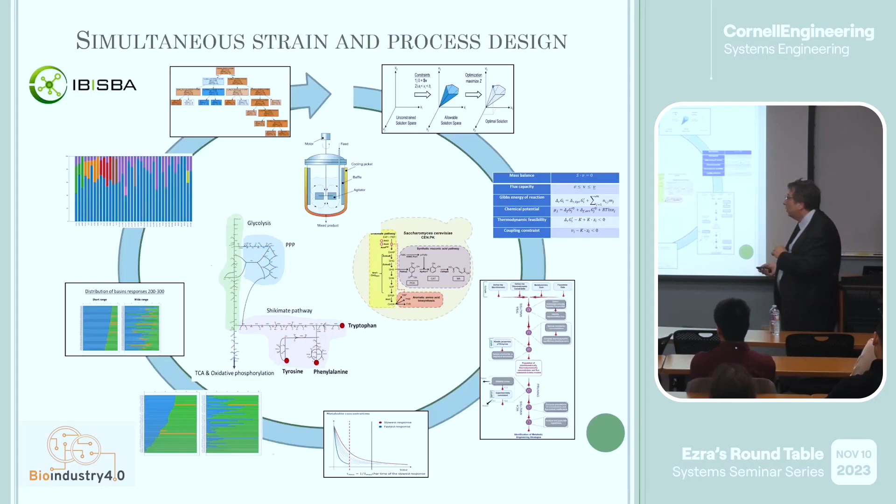And then, as I said before, you can go back to the genes, from the metabolomics to the proteomics, transcriptomics, and genomics, back and forth, upstream stages, creating things along these lines.

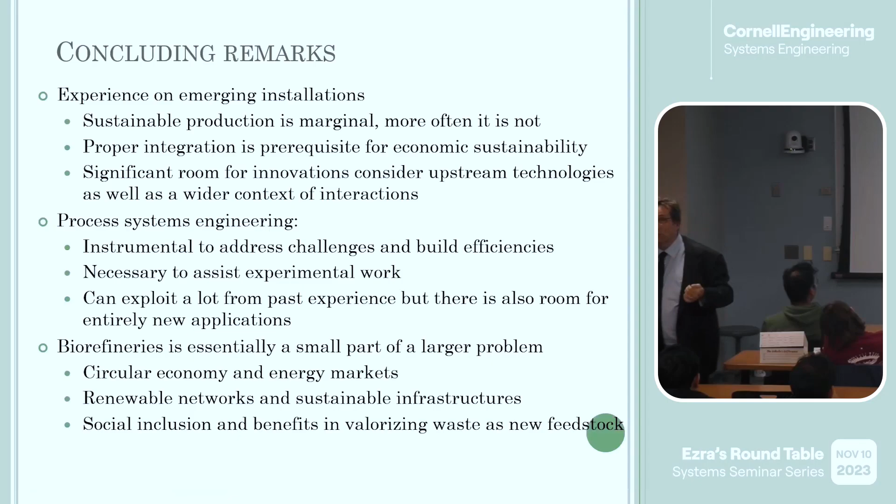I conclude here. I don't even want to read the remarks, because you are already exhausted from this. I apologize for the late start, but it's the responsibility also.